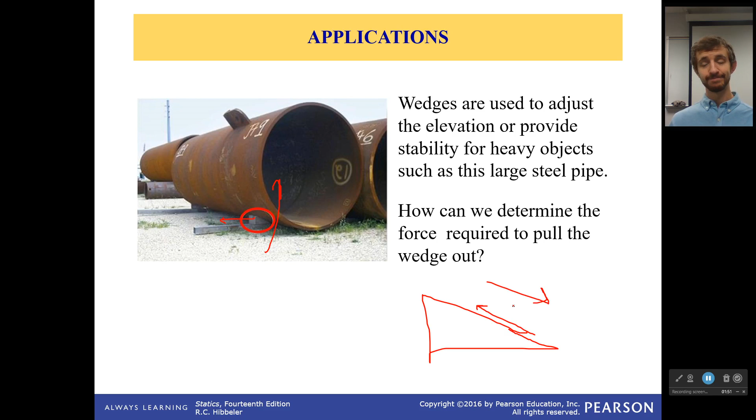And just as a note, you're going to have to always wonder, is friction going this way or is it going this way? You're going to have to figure that out by thinking about what direction everything is moving. Which direction is motion impending? That will help you. And of course, I drew right over that. Give me a second. There you go.

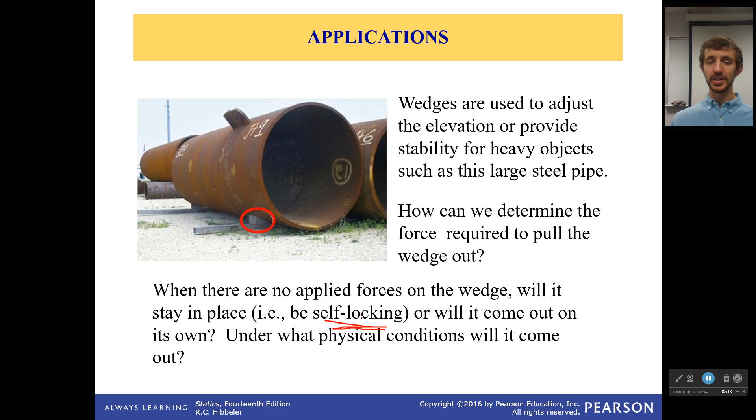Second thing you ask yourself is, if there's nothing applied to this wedge, will it stay in place? This is called self-locking. It's where the friction force is enough to hold it from moving. Or maybe over time it's going to begin to move and then pop out and this thing goes rolling down a hill and bad things happen.

Another place we see friction is not just in wedges, but in belts. You might see these if you open up your car's engine, connecting your alternator and your engine and various other parts of your vehicle. See, one nice little flat belt. What's interesting about those belts is some of them will have little teeth in them to help them hold on. Usually they're rubber belts, so these aren't very hard teeth. But not always. In some situations, it is just a flat belt, and the only thing holding it in place is friction.

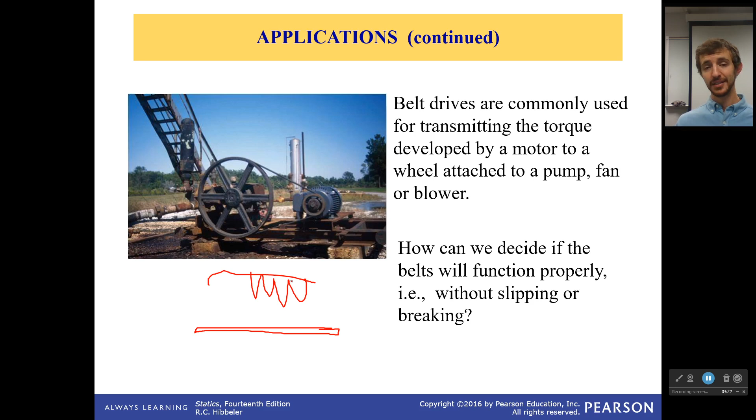So, how do you know if the belts are going to function properly? Because, let's be honest, if this is a flat belt, no teeth, and I held this wheel right here still, this thing could still move, and it might just let the belt slip around, or the engine might not be strong enough, and it will just get stuck. So, how do you tell what's going to happen? How do you tell if that belt's going to break? Well, we're going to figure that out.

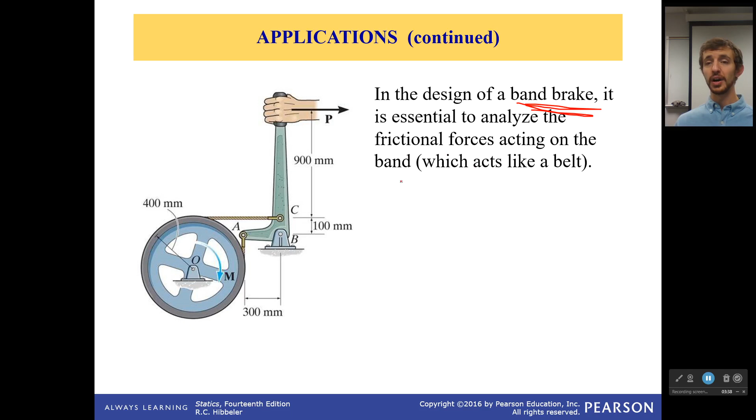Okay. Right here we have a band brake. Once again, it's really helpful because we need to know how to do this to understand the forces acting on the band, which in this case acts like a belt. This is the band right here. Can't really see it for most of it. So how can you determine the tension of the cable pulling on the band?

And second, how are the belt tension, this applied force P, and the torque M related? Well, how are they? All of that is something we're going to be talking about in this section. It will involve free body diagrams. It will involve your equilibrium equations, just like always. So get ready for that. I'm looking forward to seeing it.

So stop here, and next time we'll talk about wedges and belts and jump into some problems after that.